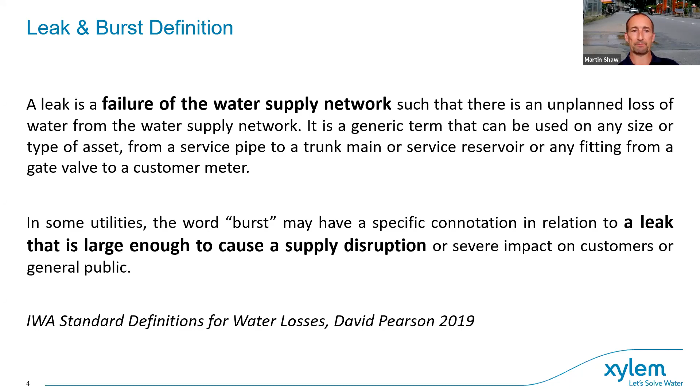Referencing back to the webinar a couple of weeks ago, one of the speakers, Dr. Amit, spoke about Taipei, a water-stressed island. They haven't had a water shortage for 17 years because of their proactive approach to water loss management. He also mentioned Paju in Korea, where customers can now drink the tap water, which they couldn't do previously. That obviously benefits the corporate image of the utility that supplies the water.

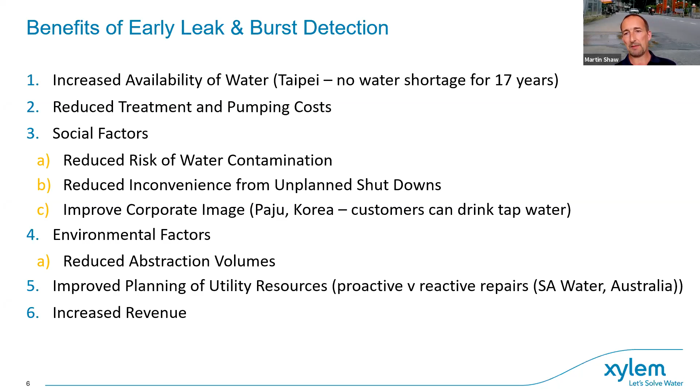Coming down to bullet point 5, there's obviously a big difference between undertaking proactive and reactive repairs. I'm going to talk about SA Water as a case study towards the end of my section of the presentation. And the last bullet point, last but by no means least, a proactive water loss management strategy can increase revenue.

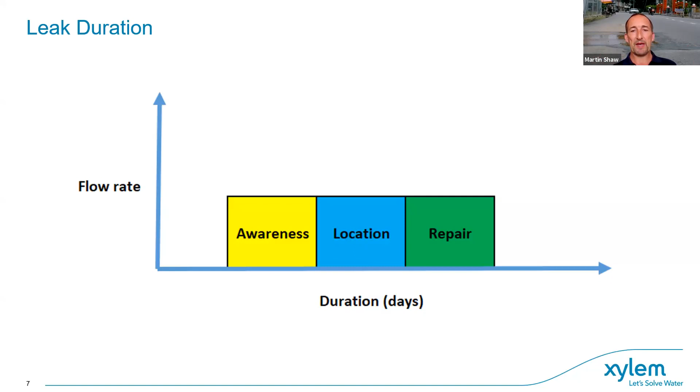So what I'm going to concentrate on is how we can reduce the volume of water lost through leaks by breaking the runtime into 3 components: awareness, location, and repair. Awareness is the length of time it takes a utility to become aware of a leak. Location is the time it takes to pinpoint exactly where it is. Repair is the time it takes to repair the leak once you know where it is. I'm going to split this webinar into those 3 components and focus on how digital technology can help reduce the time for each.

Awareness is all about enabling technology. For water loss management, the enabling technology is usually flow meters, pressure sensors, and acoustic sensors. We're going to start off with 2 scenarios here.

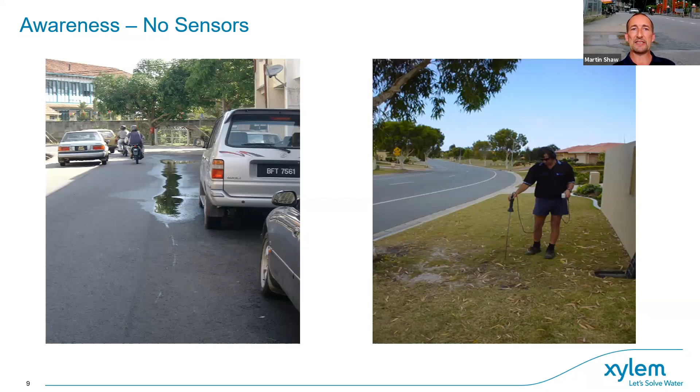So when you take both of those situations as a whole, what that means is that your average awareness time in this scenario is half of 3 years, so you're looking at an awareness time of 18 months. It's better than the first scenario, but there's still an opportunity to see if we can make it a little bit faster.

Now let's consider DMAs, district meter areas. I'm sure most people listening understand the concept of DMAs, so I'm not going to explain it. But the function of DMAs is to measure the flow that goes into a certain area, and we monitor that flow on a daily basis. The enabling technology here is the flow meter and the pressure sensor that we have in the zone.

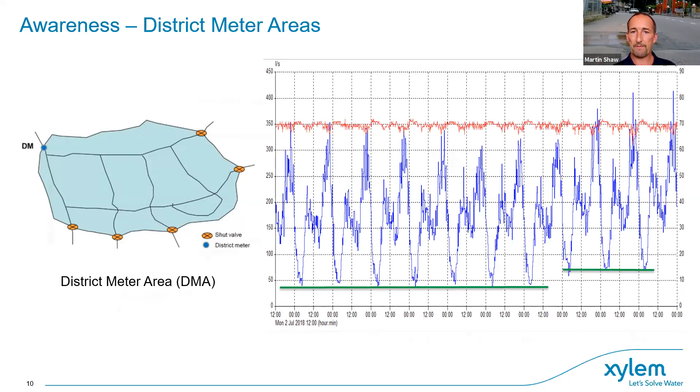And now, because we have data coming in every 24 hours, it means that our awareness time is down to less than 24 hours. So you can see how we're adding sensors and bringing the awareness time down. So is awareness time now 24 hours because we have DMAs? Well, it should be, but that's not always the case.

So if they had been looking at this, they would have seen the minimum night flow go up and they could have gone in, intervened, and done something about it, but they didn't. And the question really is, why didn't they look at it? Well, there's a number of factors for that.

One of the factors in this particular case is that they're looking at SCADA, and SCADA data is usually user unfriendly. There were no alarms set, so they didn't see that minimum night flow going up.

And even with a small number of DMAs, it's becoming more and more difficult because the data we're starting to collect now is big data. There's a lot of information coming in every day. When I first started doing non-revenue water management, we used to get 15-minute values, so that's 96 values a day for a particular DMA. Now with high resolution transient data coming in, we're getting 256 readings every second. So we're getting more data every second than we used to get in a day when I first started. It's just impossible to manage that data manually.

So the way we can do it is to bring in smart water platforms and let them bring all the data in and do the analysis for you. Smart water platforms are generally data agnostic, meaning it doesn't matter what sensors you have in the network. You can bring that data into the platform and it aggregates all the different sources—flow data, pressure data, level data, quality data, consumption, anything you want—all into one platform, helping you see what's going on in your network.

They're usually cloud-based, which means you can log in from anywhere—particularly important during this period of the pandemic. If you're in Starbucks, you can log on and see exactly what's happening in all your DMAs.

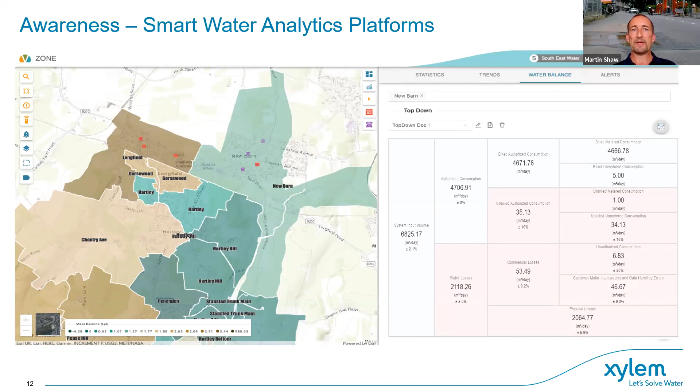So that's talking about digital technology to reduce awareness time. Now I'm going to talk about how to use digital technology to help us with location time. For leak location, there are a number of factors that determine how difficult it is to find a leak, but two of the main factors are pipe material and pressure.

This slide, on the top right-hand side, is the IWA leakage manual, and this table is taken from that manual. Straight away two things jump out. Firstly, if you look at the right-hand side of the table, you can see that for pipes over 400 mil, the appropriate leak detection method is E, which is inline inspection techniques. So what the IWA authors are recommending is that for 400 mil and bigger, you go for inline inspection.

Now, I don't have time today to look at leak detection on big pipes and leak detection on small pipes. So what I've done is I've put a reference at the bottom of the screen to a really good webinar that was run on behalf of the IWA a couple of weeks ago by Ian Rogers and Mike Wigglesworth. They looked at how you can detect leaks on big pipes and the importance of doing so. So if your water loss management strategy doesn't currently include big pipes, I'd recommend you have a look at this webinar. It's really good.

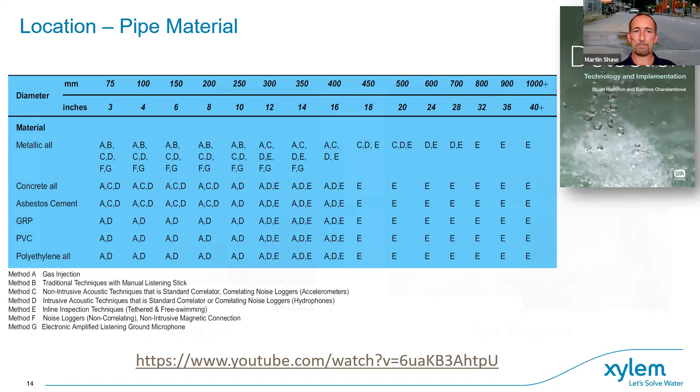So that's looking at pipe material and how it affects leak detection. Now we'll look at pressure and how it affects leak detection. You can see very clearly, the way that the sensors detect leaks on the network is by picking up the energy that is released as the water escapes from the pipe.

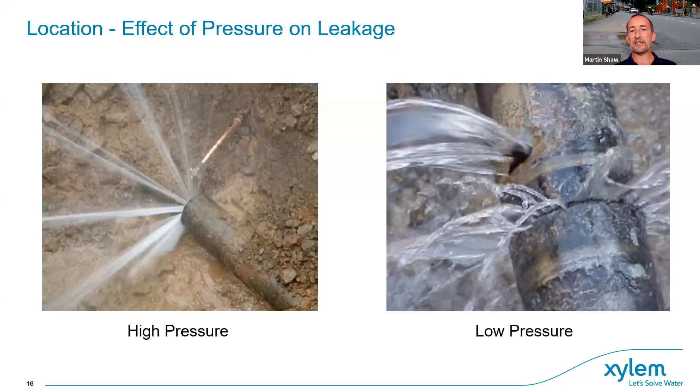On the left-hand side, you have a burst, a leak under very high pressure. On the right-hand side, you can see low pressure. It's clear that the energy released from a high pressure leak is going to be a lot more than that released from a low pressure leak. So what that means is that you're going to be able to detect leaks under high pressure a lot better than you're going to be able to detect leaks under low pressure.

Correlating noise loggers are designed to do the same thing. If both loggers can hear a leak, that means they can correlate, they can measure the time it takes for that leak noise to reach the sensor, and they can tell you the distance between the two sensors where that leak is at. So they're very, very useful for pinpointing where those leaks are in the network. So now what we're saying is that you can actually sit in your office and see where the leaks are in the network, which is fantastic.

But now you've got to think about, again, the amount of data that's coming in. So now we start adding even more sensors that are all sending alerts in, and we're bringing even more data into the equation. Imagine having 1,000 of these noise loggers out. How are you going to manage the information coming in? Well, some of the UK utilities have tens of thousands of noise loggers. I think Thames Water have got something like 30,000 individual noise loggers out on the network, all bringing data in.

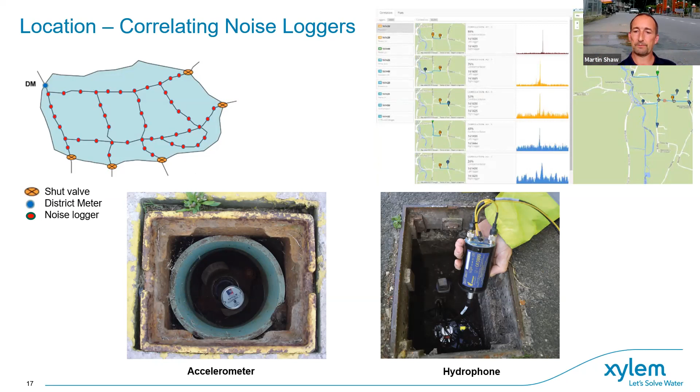And again, by turning to your smart platform, you can let your digital technology do all the hard work for you. Rather than having somebody sitting there looking at every single individual alarm that is brought in, the platform will look at all the different alarms coming in and aggregate them into incidents.

So let's say you've got a DMA, and let's say you've got 5 noise loggers, and the 5 noise loggers can all hear the same leak. What you don't want is all 5 loggers sending in 5 alerts, and your minimum night flow alert going off, and your pressure alert going off because the pressure's dropped. What you want is a platform to tell you that all of these incidents are related to one leak and to tell you where that leak is.

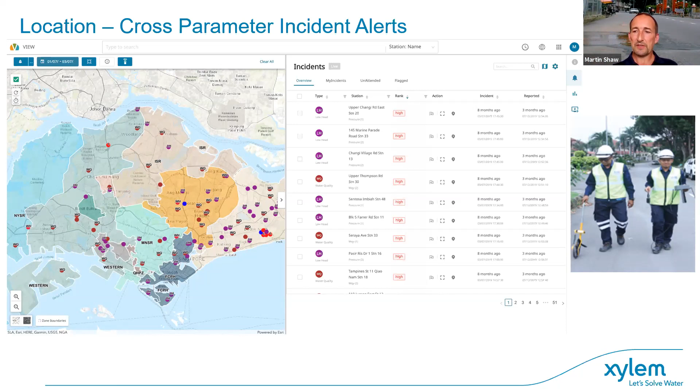And not only that, it can automatically generate the work order to send the leakage teams out to investigate so that they can pinpoint where that leak is. So that's how we can use the digital technology to help us with the location time. And now we can look at the repair time. How can we reduce the repair time of leaks?

They need to know the size. They need to know the material. They need to know where it is - is it in the road? Do we need traffic control? Is it a busy road? Do we need to contact the highway agencies? We need to know what depth it is. Can we excavate it, or are we going to need shuttering?

And once you know all that, you also need to know, are you going to have to shut that section of main down in order to undertake the repair? Because if you need to shut it down, you're going to need to know which valves to shut, and which order to shut them in, so that you don't create dirty water. And if you are shutting down, have you got any sensitive customers who are going to be affected - dialysis patients, large users - you're going to want to communicate with those customers before you just shut the water off.

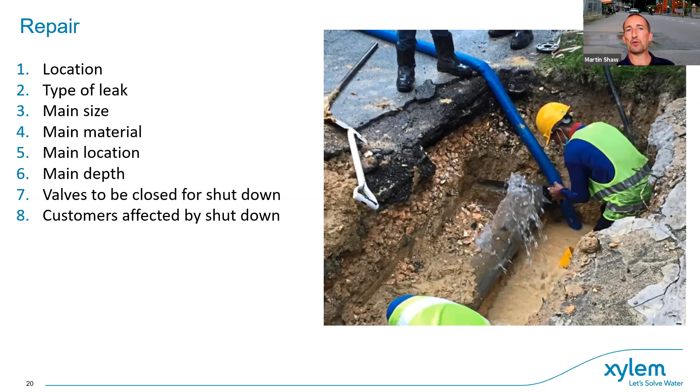Okay, case study. This is South Australia Water in Adelaide. These guys were having problems with bursts in the CBD. And obviously, if you have a burst in the CBD, that's going to affect the customer supply to customers. It's going to affect traffic. So what they decided to do was set up a smart network to see if they could reduce the number of bursts they were having in the CBD.

The main intent of the platform was to try and identify leaks before they ran too long and turned into bursts. They also wanted to identify if there were any damaging transients in the network, because if transients are bouncing around the network, that's going to stress the pipes and cause leaks and bursts as well.

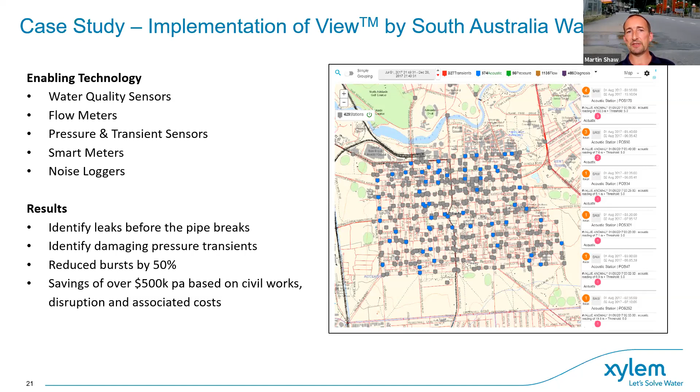The problem is that there are things that will weigh you down and make you run slower. Some of the factors that make you run slower are transients. If you've got transients in your network and don't know about it, there's a good chance they're causing your mains to break, and unless you remove those transients, they're going to continue to break and continue to weigh you down.

Poor pipe replacement—if you're taking an old leaking pipe out of commission and putting a new pipe in, you want to make sure that pipe lasts for its design life. You don't want it to start leaking before that design life finishes, because if it starts leaking straight away, that's also going to make you run slower. It's the same with leak repairs: if you fix 100 leaks and 10 of them start leaking again within a month, you're running against the curve, and you're going to find it difficult to maintain your NRW when all those factors are pulling you back.

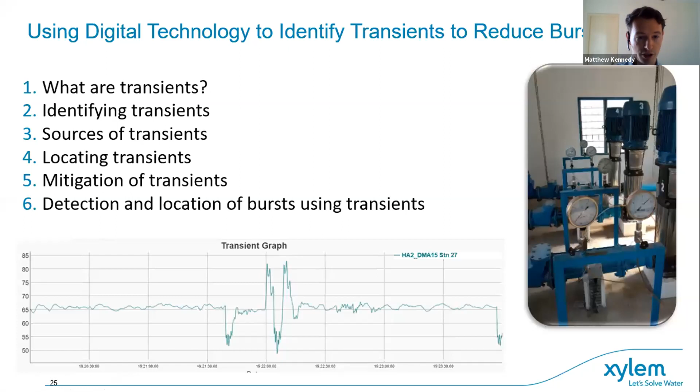The outline of this presentation for the next 20 minutes is to give you an idea of what transients are. Martin's mentioned them a little, but we'll go into more detail: identifying how we can find them, their sources, how we can locate them, and how we can mitigate them. Transients aren't a particularly attractive thing to look at - a lot of this presentation will include graphs like the one at the bottom here, covering time along the bottom and pressure in meters up the side. There will be lots of these.

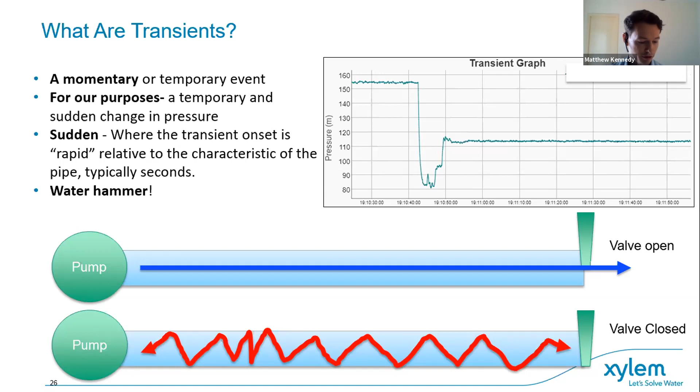So what is a transient? It's a momentary or temporary event, and for the purposes of this presentation, it's a sudden change in pressure. Sudden in this case means the onset of the transient is rapid relative to the characteristics of the pipe, typically in seconds or less than a second. Many of you may be familiar with this term as water hammer. Transients are very difficult to see, but we may see the consequences of them - many of you may know them from your own house piping as the thunk sound you get when you turn off either your kitchen or bathroom tap. That thunk sound is the change in momentum from the water in the pipe stopping when you close the tap, and that change in momentum introduces a pressure wave into the pipe.

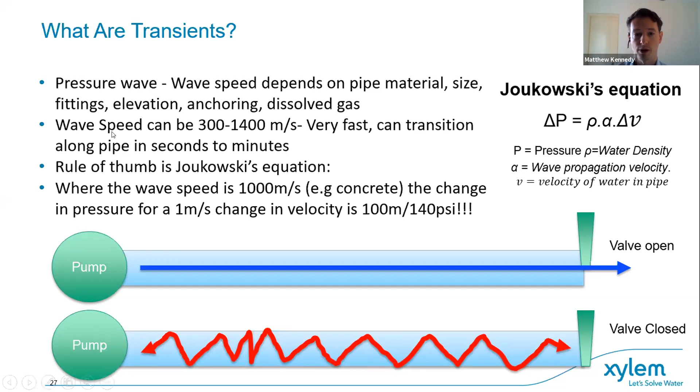That pressure wave bounces around inside your pipe network and is eventually absorbed. The pressure wave can move through the pipe at very quick speeds - at its slowest, 300 meters per second, up to around 1,400 meters per second. So these pressure waves can transition along the pipes in seconds for all but the very longest of pipes. The impact of that pressure wave in terms of magnitude - the only equation I'll use in this presentation - can be approximated using Joukowski's equation. Simply put, if you have a flow of water in your pipe moving at 1 meter per second and you slam the valve at the end of it, with a wave speed typical for a concrete pipe of around 1,000 meters per second, that will result in a surge in pressure of 100 meters or 140 psi, which has to be absorbed by the pipe. You can see in the images at the bottom of this slide, it's effectively concertinaing the flow of water in your pipe, and this pressure wave will bounce around inside your pipe network until it's absorbed. So why do we care about this?

It can cause damage to your pipes, either in an instantaneous manner. An exceptionally large transient may burst your pipes at a weak point in the network. And transients can also cause damage to the network through the cumulative stress of numbers or frequency of transients over time.

And so we care about them at the moment. As Martin introduced the concept of awareness, location, and solution, I'll take you through how we become aware of transients on our network. If a transient occurs and nobody is looking, does it really exist? Yes, the answer is yes, but it's only until now that we've really been able to monitor and look for them.

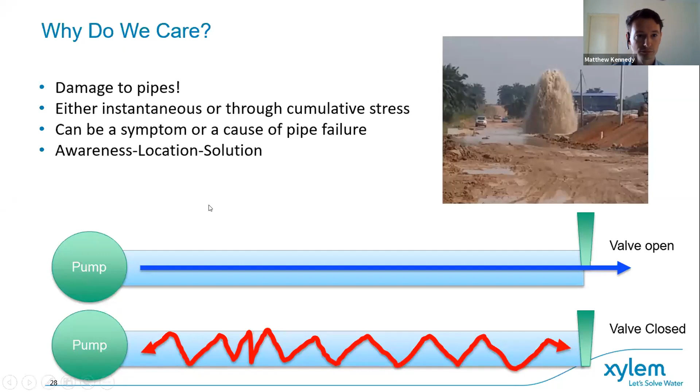So here are some images of some recorded transients, and I'll talk briefly about how we might be able to classify them and what types of transients we can get. They can be both negative and positive.

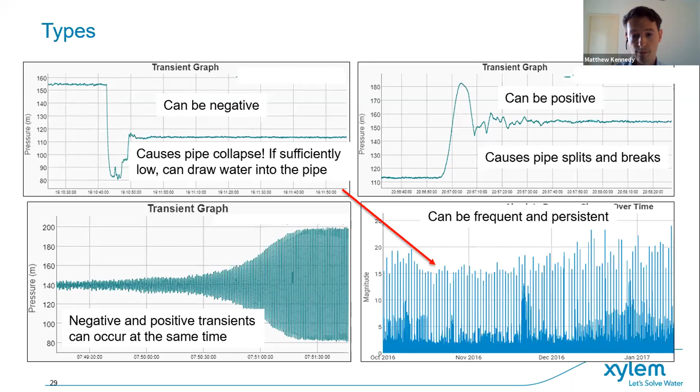Here's some further examples of transients and some of their causes. You may get them from overactive pumps, turning on or off every minute, 2 minutes, 5 minutes or so, surging the pressure and then dropping the pressure.

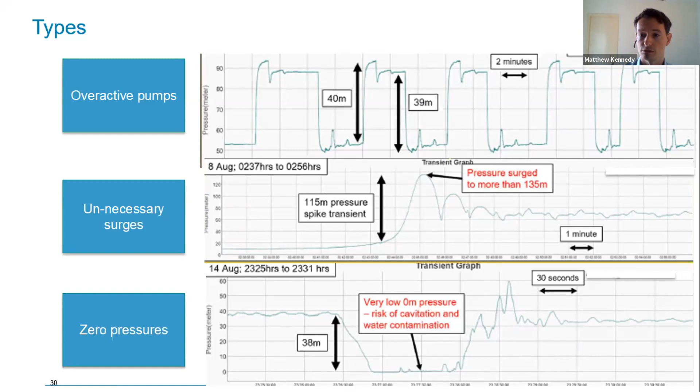So where can these be coming from? How do we find them? I've already mentioned pumps a fair bit, and pumps get a fair bit of scrutiny and flack for causing transients. The startup and shutdown of pumps and the speed of that startup and shutdown can introduce very quick transitions in pressure into the network. And depending on your pumping regime, this can be quite frequent.

It's also worth considering the sudden drop in pressure that you may see as a result of a power failure. This can introduce very large negative transients into the network as the pumps suddenly stop. But what often also requires looking at would be pump check valves, where if these are configured or designed incorrectly, an excessive pressure difference as the pump changes from start to stop or vice versa can cause these valves to slam. And this introduces transients also.

We can also see across the network that any other type of valve can be capable of introducing transient behavior, whether it is manual, automatic, such as PRVs or altitude valves at tanks, or whether it is even customer demands for some of the larger customers on the network. Similarly, air valves, when these open and close, particularly during a very fast pipe filling exercise or even normal venting, these can also introduce transients.

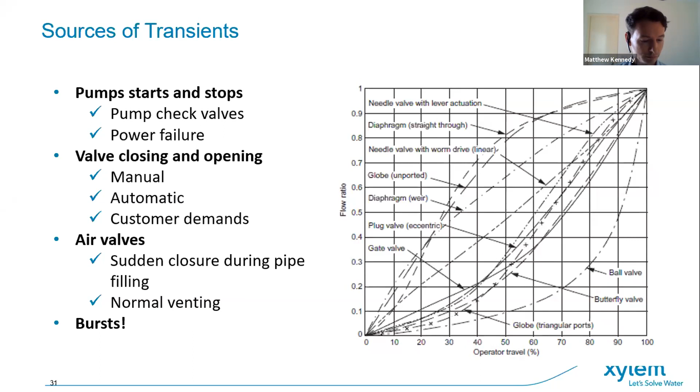So this high resolution recording also requires a very large amount of data. Martin also mentioned 256 Hertz, or 256 readings per second. That's 1 gigabyte per sensor per month. That's hundreds of thousands of times more data than a 15-minute resolution of recording.

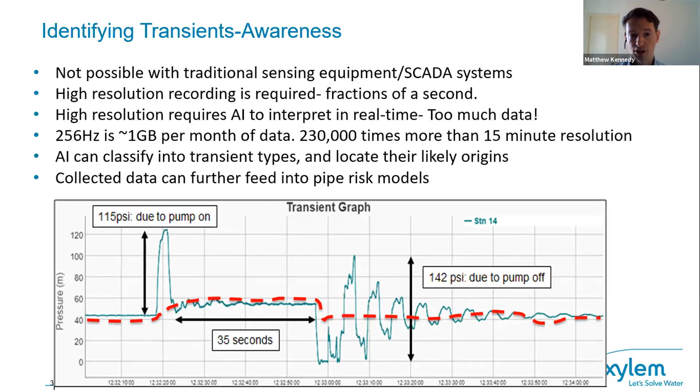We need artificial intelligence and digital solutions to analyze this data in real time. No one person can take this on themselves. That artificial intelligence can also classify into different transient types, and with other collected data can feed into pipe risk models.

So how do we collect that information? Well, we do need specially designed sensors for this purpose. We need a high resolution pressure sensor capable of recording below or sub-second frequency. We need a specially designed telemetry unit that can cope with the bandwidth of that data and transmit it in real time if we're looking for bursts.

Most importantly, we also need very accurate time synchronization so we know exactly when the transient has occurred. I'll explain this on the next slide, but the reason this is enabled is by having high accuracy GPS time synchronization.

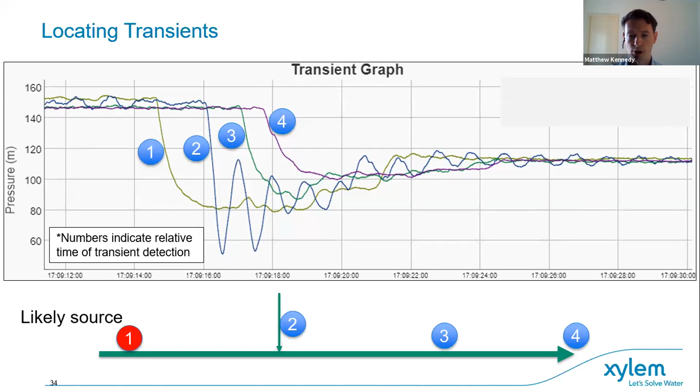This would only give us a very large range of pipe that we could look at. So further techniques can look at the speed at which the transient pressure wave travels along the pipe and the time of arrival at those sensors. Along with that information, this can be used to more accurately locate the transient. So we would be talking in the region of 100 meters or less accuracy, depending on a lot of different parameters here in terms of pipe size, pipe material, and travel time.

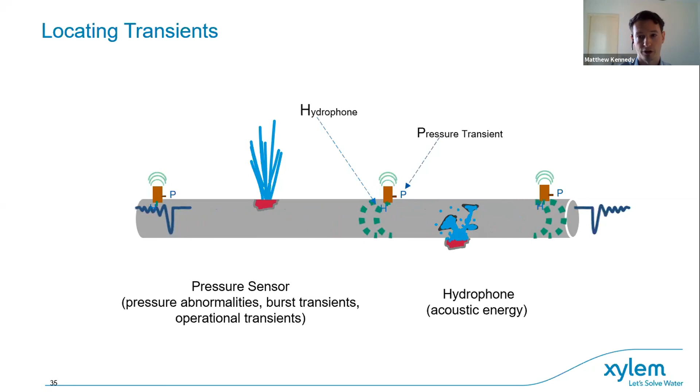This can be further improved using transient modeling, theoretical equations with the inputs of the known pipe details, including losses, and the input pressure data from the sensors. From this, we can get much more accurate locations of the transients.

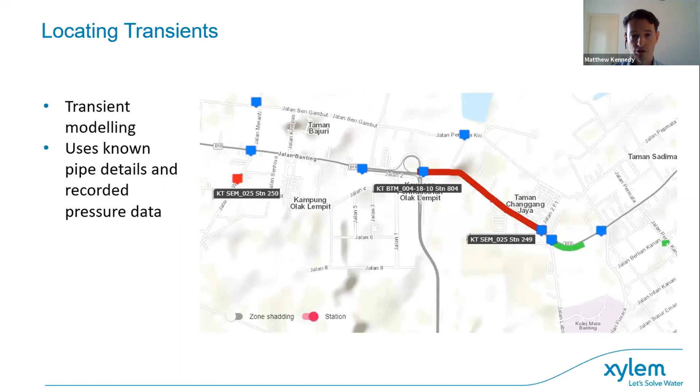So knowing where they are, or knowing that they exist and where they're coming from, how do we go about solving them? If we've identified the source, we can look into a range of possible solutions relating to that. So for pumps, we would want to look at slowing down the initiation, or the start and stop, of those pumps. That can be possible with variable speed drives, soft starters, and flywheels.

With regard to check valves on pumps, we can look at automating these so that they can better anticipate the startup and stop of the pumps, so that we don't see excessive pressure differentials across them leading to slams. We can look at better design or right-sizing of equipment, better maintenance to ensure it functions properly as designed. And very easily, we can adjust our valve operating procedures so that they're not too quick.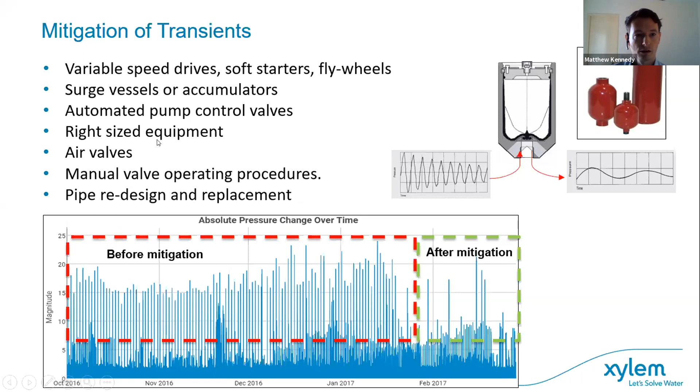We can also use the sensors to give us early warning of bursts. This can mitigate the impact of those bursts by allowing us to respond more quickly, address and fix that burst before too much water is lost.

This is possible with transient sensors because often our knowledge of a burst relies, as Martin mentioned, on this being visible above ground and reported by the public. In the absence of that, you may rely on traditional pressure sensing or tank levels to know when those have dropped below an alarm level. Sometimes this can take quite a long time for long pipes as they empty, and it may take several hours for you to become aware of that.

So keeping an eye on the time here and knowing we're close to the end, I'll move on to a summary of what I've just discussed.

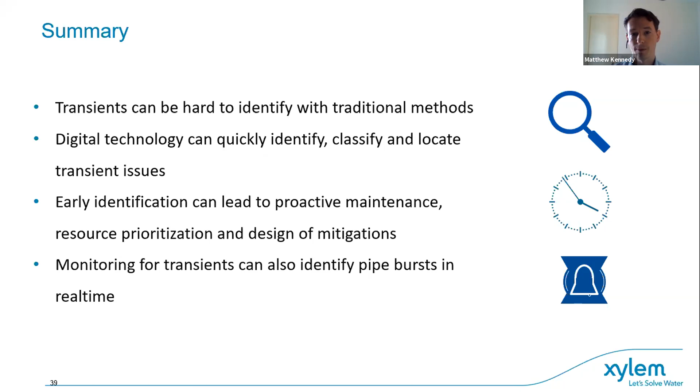And so to conclude the session overall - Martin wrote this one - digital technology has arrived. It's here to stay. Machine learning and artificial intelligence will further improve our ability to reduce water loss in the future. Using the IWA digital water report that Martin referenced earlier in his presentation, utilities must embrace digital solutions. There really is no alternative. We can provide access to that report if you contact us after the presentation. But I will conclude there and allow you now to ask any questions.

Thank you, Matthew. There is a question for you from Rongmo Liu: how to handle multiple transient signals within a pipeline network?

Great, thanks for the question, Rongmo. Multiple transients in a network can be occurring from multiple sources or at multiple different times. How can we handle them? With a distributed sensor network, we can identify multiple sources of those transients, using specific sensors in specific locations to say this is coming from customer A, this is coming from your pump house. If they're coming at different points in time, we can also use those distributed sensors to monitor how those transients propagate through the network - how far do they travel? Do we need to look at our entire 20 kilometers of pipe, or is it only the first 2 kilometers predominantly affected by this issue? So we can prioritize location using these sensors and monitoring multiple transients. Hopefully that answers your question.

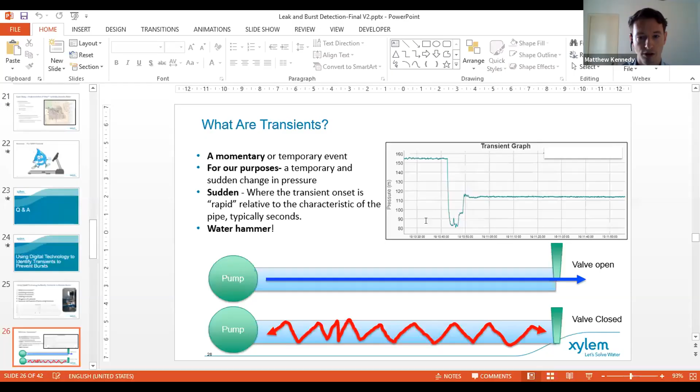To address the second part, regarding battery life, yes this does result in greater power demand on the sensors, but modern technology now allows this to be done with low power and relatively small battery footprints. Sensors can last for continuous transmission of data up to a year or more, and for summary data even longer. This can be further supplemented with solar systems and larger batteries, and we have found effective ways of deploying that around the region on the projects we're currently delivering.

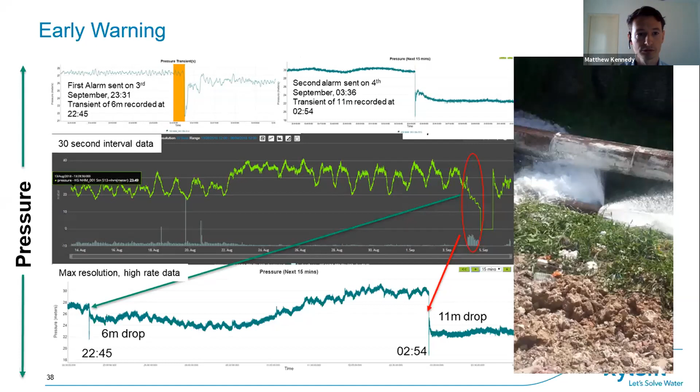Thank you, Matthew. No open questions, but I would like to ask a question.

Mike, can I just jump in very quickly? Yes, please, go ahead. Just to clarify, the IWA manual we were referring to earlier, the leak detection manual, is £85, but the digital technology report from the IWA is a free download. I just wanted to clarify that.

Excellent. So before my question, Matthew - I don't need to ask it yet - there's another question for you from Will Jem: Can PRVs absorb transient pressure during step test activity?

We have seen a number of cases in our monitoring about how PRVs respond to pressure. Often a transient pressure wave may be occurring quicker than a PRV can respond. But what we often observe with PRVs is that they can be a source of transients into the upstream network as they try to hunt around a static pressure for the downstream network. Some of the benefits of this high resolution transient sensing is that we can also record how effectively these PRVs are working, whether they have failed, and whether they are introducing more issues to the network than they're solving.